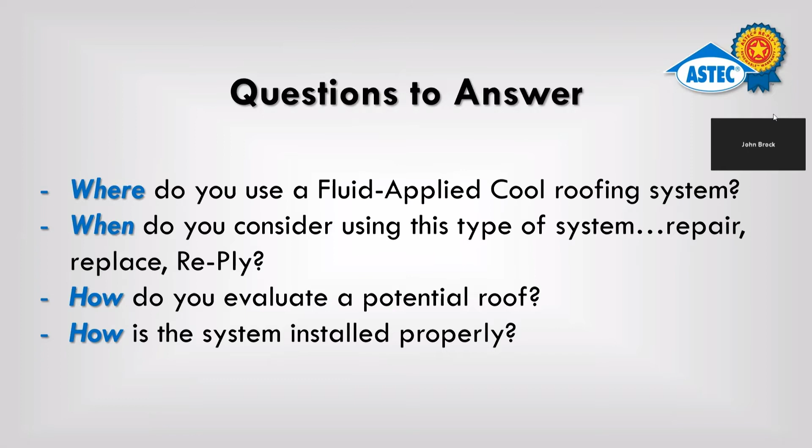So 35 years, 500 million square feet. There is a 10 or a 15-year manufacturer's renewable product and labor warranty. What that means by renewability, and we just did this back in 2015 on one of the most notable jobs we've done. You'll see photos of it later in the presentation. The Pensacola Naval Air Museum. If any of you have been down to the Pensacola area, we did it in 2005. They asked us to come out and redo it again in 2015, which we did.

So when the warranty comes up for renewability at the end of its life cycle, at the end of the warranty, you have the choice of having us come out, cleaning the roof, making any spot repairs, preventative maintenance as needed. The roof has already been waterproofed, so there's no need to waterproof it. We simply clean the roof and we install another 2 passes of our finished product over the entire roof. Once installed, we turn around and reissue another 10-year product and labor renewable and sustainable warranty. That is something you do not get from a typical roof application. That is one of the unique things with what we do and how we do it.

We talked about being monolithic. There are no seams on our system. We are Miami-Dade approved for wind uplift, which is very, very important. We have our product over the New Orleans Convention Center. And when Hurricane Katrina hit the Convention Center as a Category 4, I vividly remember watching that on TV as the Superdome's roof was peeling back. They were busing people and sending them over to the Convention Center. After Hurricane Katrina, we had 3 to 5 leaks on that building. Again, with no seams, there's nowhere for the wind to get up underneath it and to lift the roof. Therefore, we are Miami-Dade approved. Again, one of the most stringent in the United States.

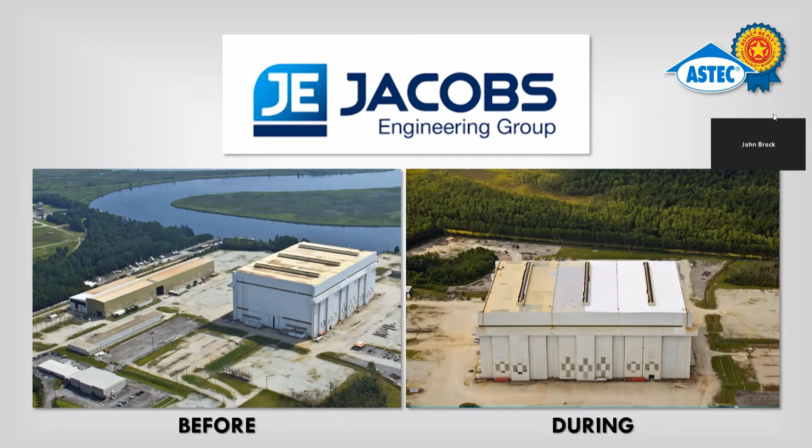Some of you may have heard of Jacobs Engineering Group, a very large organization here in our United States. You'll see a before here on the left, you'll see a during on the right. Again, this is several hundred feet up, the size of this facility. We had only bid this building originally, but things went so well that we ended up doing all the facilities that were there on the grounds, and you can see that there in the photo.

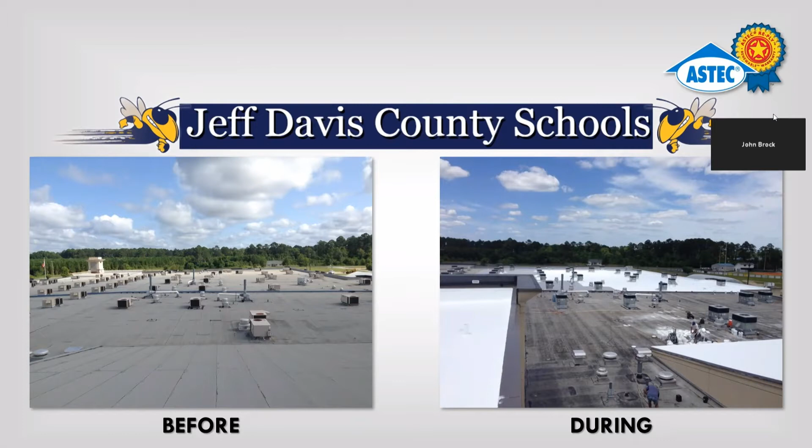Jeff Davis County Schools, this is a job that I sold in Jeff Davis County, Georgia. The city was Hazlehurst. This was their high school. This was a modified cap sheet roof, which is similar to your courthouse roof. And we put a system on here, a fluid applied system. You have the before, you have the during on the right, and then you have a drone photo of the after.

We actually were brought this job by a company called ABM out of the Atlanta area. They're an energy consultant group that companies hire to come in and show you how you can save money. And they chose to go with the ASTEC system for the roof. You can see the HVAC units up there.

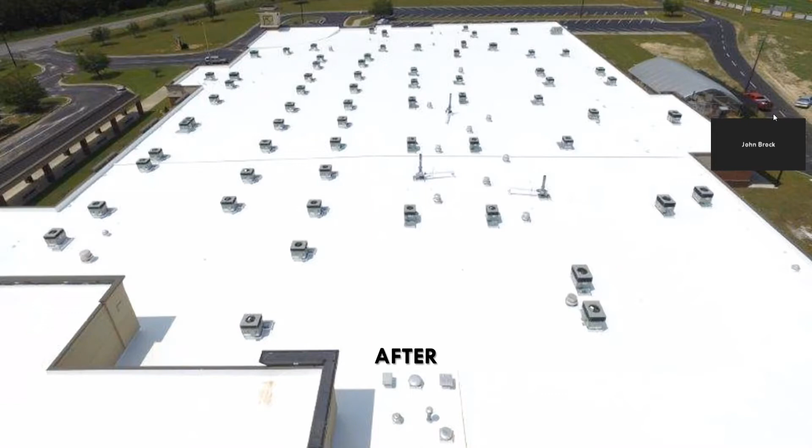I actually got a call several months later after we installed our system. They were worried that their ACs were broken because they weren't kicking on. Again, when you drop the roof surface temperature as much as 65 degrees, you're dropping your HVAC substantially when you have that many units up there. And they don't have to be serviced as often as well. So big benefits when you start looking at things this way. And of course, I've got a plethora of different reference letters from superintendents and different people throughout our organization.

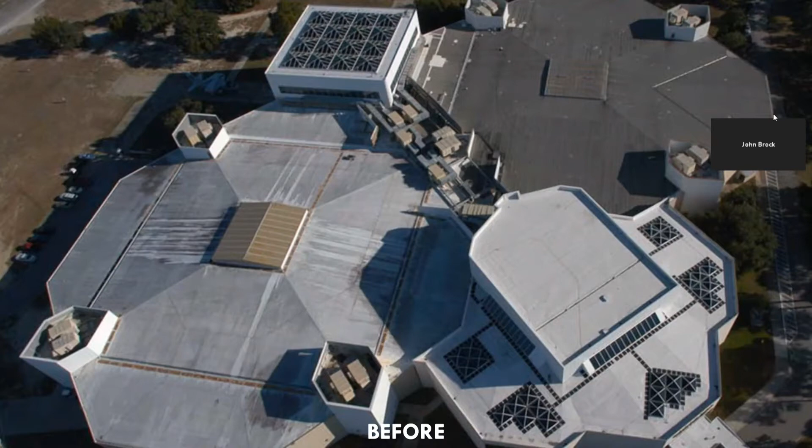The leaks were so severe in this museum that before ASTEC was installed, they actually had constructed an internal guttering system that drained rainwater into 50-gallon drums. That's how bad this roof was. Since then, again, we did it in 2005. We were contacted again in 2015, and we put the recoat on it in 2015.

Sustainability, that's a word we throw out there a lot. You know, what is sustainability? Well, it minimizes the burden on the environment, which in these days, we all feel that there should be a sense of urgency. It conserves the energy, and it extends the life of your roof by improving the long-term performance.

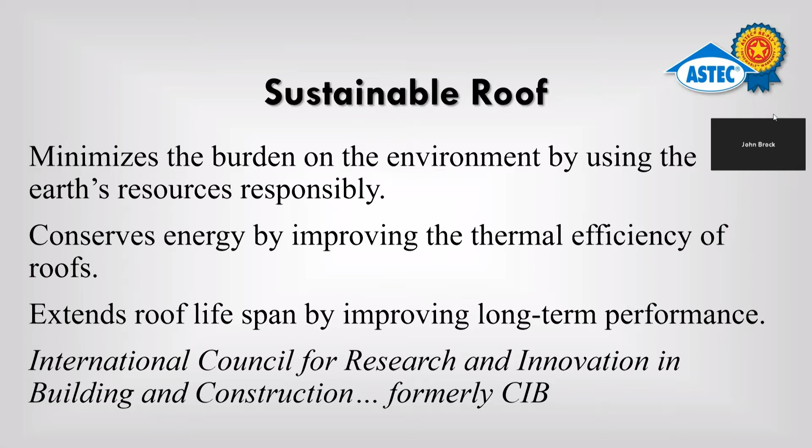We talked about temperature differential. These black EPDM roofs that you see here, the very bottom, 173 degrees. And then once you put our system in place, you're looking at what can actually happen and what happens once we're done. We're typically somewhere within 5 to 10 degrees of the ambient temperature outside.

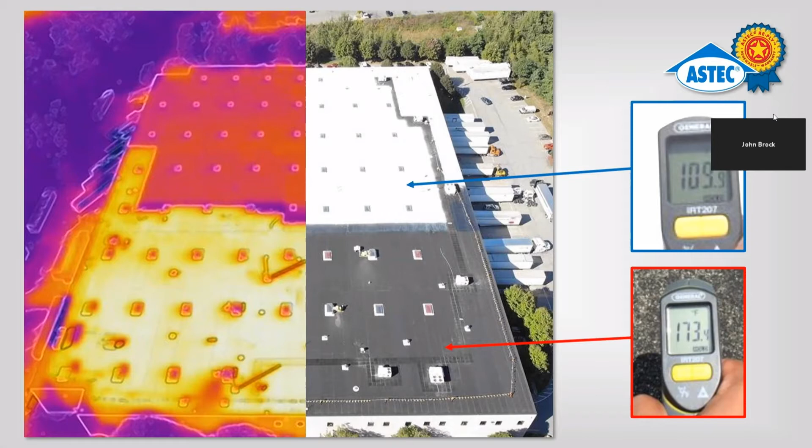So we need to evaluate, do roofs actually need to be torn off? Our network of contractors consists of roofers, waterproofing companies, commercial painters. A lot of different types of fields can install our system. Roofers make their living by ripping roofs completely off. But what's happened over the last 20 years is they realize not everybody has the funds to go back and pay X amount of dollars to tear the whole roof off, or they can't afford the downtime.

So roofers have come to us, and we've been able to recruit roofers as well, as a way of continuing for them to stay in front of their clients by offering a legitimate long-term solution through fluid applies, which is much easier on the wallet, I guess is a better way to say it. When we evaluate roofs, we have to know what is the condition of what's under that roof. You can't just go throw any product up on a roof and walk away from it.

There are plenty of people that do that. But again, we hold the warranty, so we have to make sure we got the right contractor. He sends photos to us of the core sample, of the deck, of the roof, of everything that we have to file away, and we have to make sure this roof actually qualifies. What type of insulation? How many inches of insulation? This is not a paint job. This is actually a very, very in-depth process.

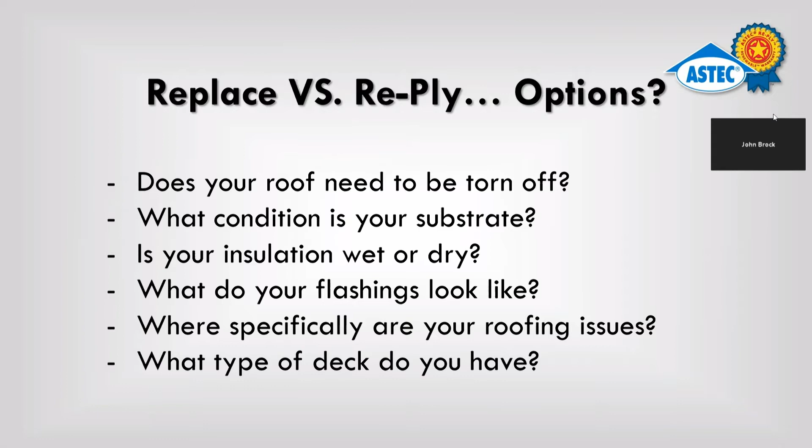What are the actual roofing issues? What do the flashings look like? What type of deck is underneath there? Is it metal? Is it wood? Is it concrete? Tony's going to go into a little bit more information on this later on, but when we look at life cycle costs, if you're looking for long-term benefits, we've got a conventional roofing system approach on the left, and then we've got the ASTEC system on the right.

So by national code, once you have two roofs up there, meaning your first roof might have been a tar and gravel roof, and then they came back years later, removed the gravel, or in some cases left it on, and then put a rubber roof over top of that, now you have two roofs in place. By code, your only options are to, one, tear off one of those roofs and put a new roof on, or option two, go with the fluid applied product. And so that's important to know.

Now, in this slide right here, you see a 2020 roof system. On a conventional system approach, you clean the roof, assuming there's one roof up there, and you can put another roof on top of it. For us, we go directly over that roof. We are a sustainable system, whereas a conventional roof system is not a sustainable system. We have up to a 15-year renewable and sustainable warranty.

What does that mean? That means for the full 15 years, if you have any issues on your roof, it is a phone call. You don't have to keep sending the local guy and his ladder to get up there and patch a hole with tar or silicone or any other product. We own that roof. It's a phone call.

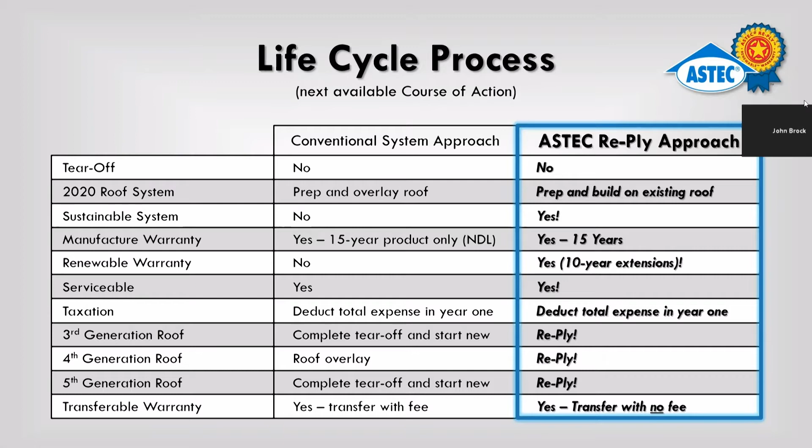Again, we simply clean the roof. We put 2 to 3 more passes of the finish coat directly back on the existing roof to rebuild the mil thickness of the product, and we go about the day. And that's it. We continue to do that. And both systems have a transferable warranty.

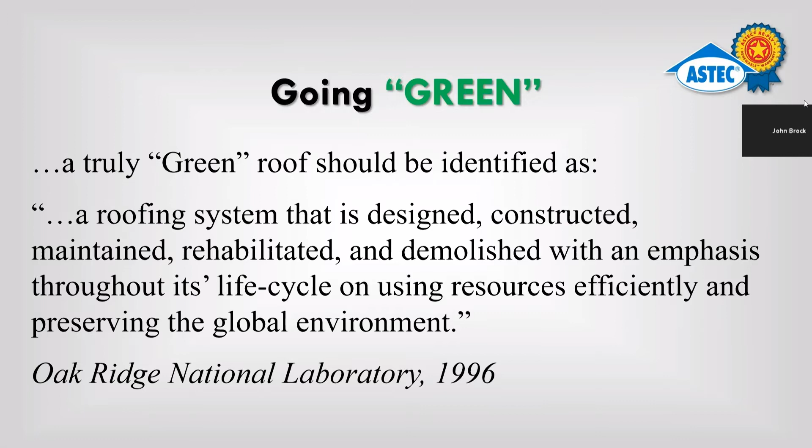A truly green roof should be identified as a roofing system that is designed, constructed, maintained, rehabilitated, and demolished with an emphasis throughout its life cycle on using resources efficiently and preserving the global environment. And that is exactly what we do with the ASTEC system.

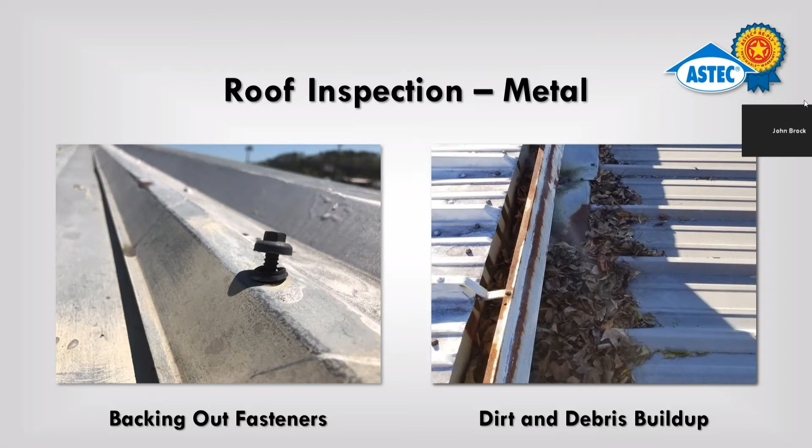Rust is a big problem on metal roofs as well. There's a lot of companies that will come out and just throw something over top of that rust. If it is not a rust inhibitor, and if you don't put the proper amount of coverage over that rust inhibitor or over the rusted spot, the rust will bleed through.

So we're not a one product fixes everything. We're not going to get on the roof and throw one product over there and say, hey, this will fix your rust, this will fix your moisture underneath, this will fix all. It doesn't work that way. We have to address each and every individual problem on its own. And we have a rust inhibitor, which is specifically designed for encapsulating the rust. It shuts out the air and water in which it needs to continue to grow and expand.

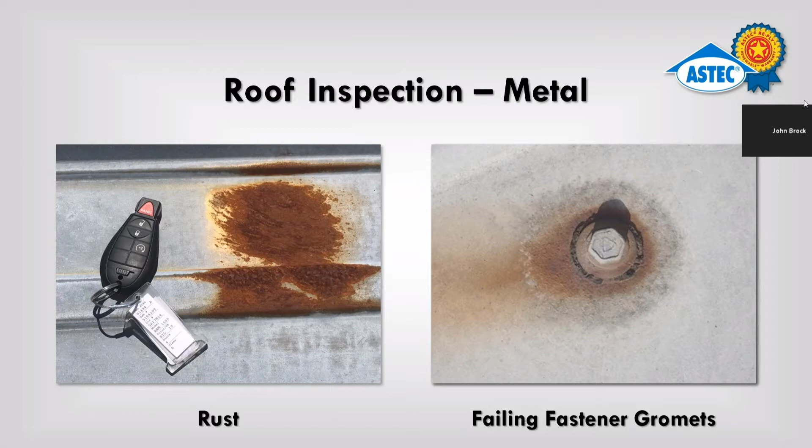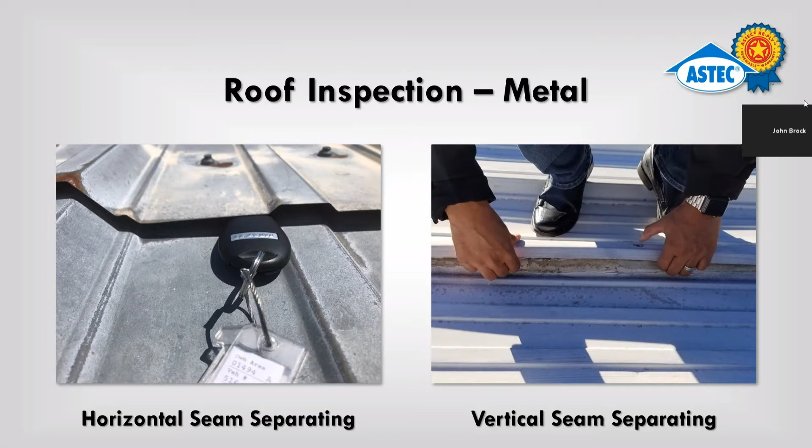You can see here in this particular photo how seams begin to open up. A lot of times this is due to thermal shock. A lot of times this is due to poor installation on metal roofs. It is important on any type of roof, whether it's a metal, whether it's what we call a cap sheet or an asphalt roof like the courthouse, or if it's a rubberized roof. Any pre-existing patchy material has to be cleaned.

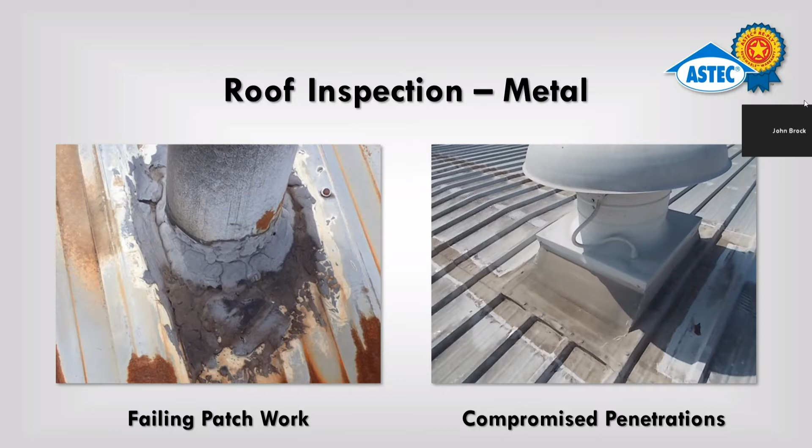We can't just throw our product over this, what you see here on the left, and call it a day. We are only as good as what we adhere to. So if there's any patching material on a roof like tar or silicone or roof cement or anything of that nature, it takes time for the contractor to take a 5-in-1 or a grinding wheel and grind all of that off to get down to the original roof so that we have a coatable surface.

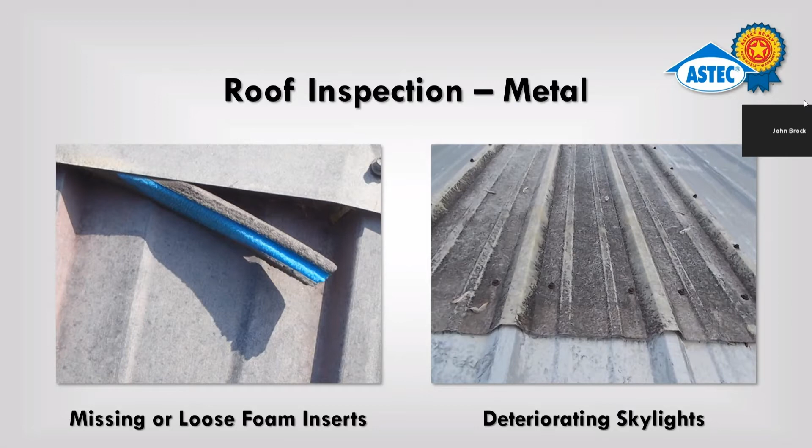We do address deteriorating skylights, and we address missing or loose foam inserts. I do realize a lot of you may have not been up on roofs before from a commercial standpoint, but on these commercial roofs, a lot of times the metal companies, when they put these roofs up there, they'll put these little foam inserts in these voids. The problem is they don't stay and they deteriorate.

So over time, as you can tell on this slide, we have a system that is foolproof in stopping these issues. This is a very tedious and time-consuming process, but it is a foolproof system. In 15 years, I've never seen a leak come from this system once it is completed.

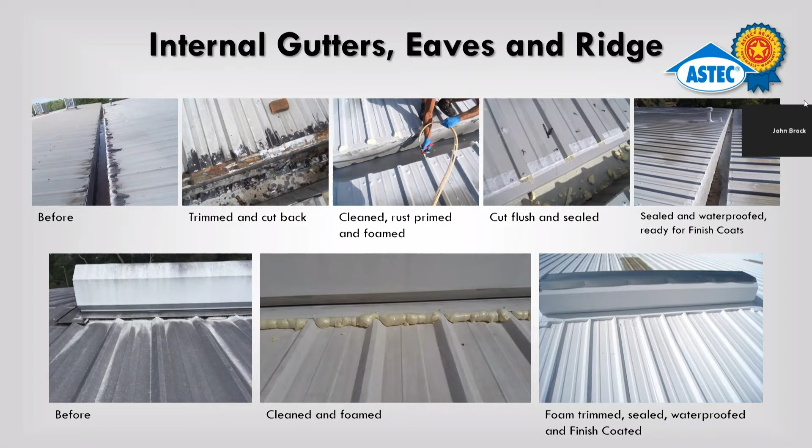So on metal roofs, we tighten everything. We replace any fasteners that are wallowed out or rusted; we'll take it out and put the next size fastener in. Any line items, such as replacing fiberglass skylights with transite skylights or new fiberglass, or if we don't need the fiberglass skylights anymore, we can put metal up there. Those are things that our contractors are skilled and qualified to do.

The actual ASTEC product is applied by a hydraulic spray rig in most cases. In some cases, we do roll it, like we will be doing on the courthouse. But the roof, first and foremost, has to be pressure washed and it has to be clean. Any areas that need to be repaired get repaired. We seal the entire roof. There is not an area on that roof that does not get fully reinforced with a fibered cloth embedded into multiple layers of a waterproofing product.

At some point, Tony will show you a sample of our product, and you'll be able to feel for yourself and see the actual thickness of our product. Where I'm sitting right now, the paint on my walls is probably 2 to 3 mils thick. We build our membrane very similar to a rubberized roof, where we're the same thickness or thicker. We're building a 50 mil system up to a 100 mil system depending on the roof. And that's the beauty of a fluid applied system: it is customized specifically for your needs.

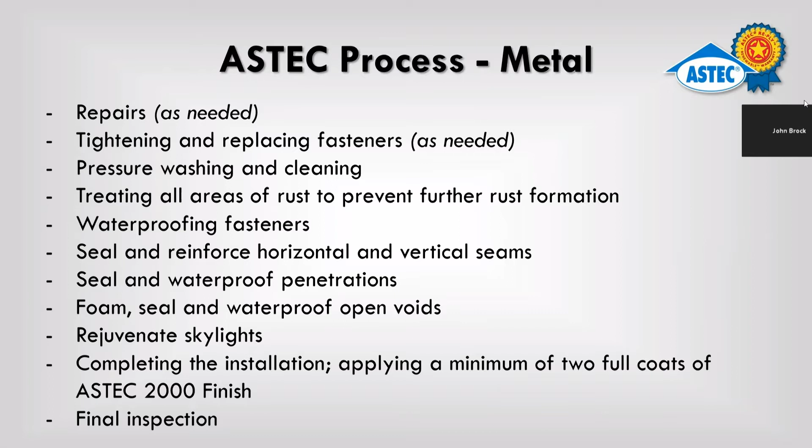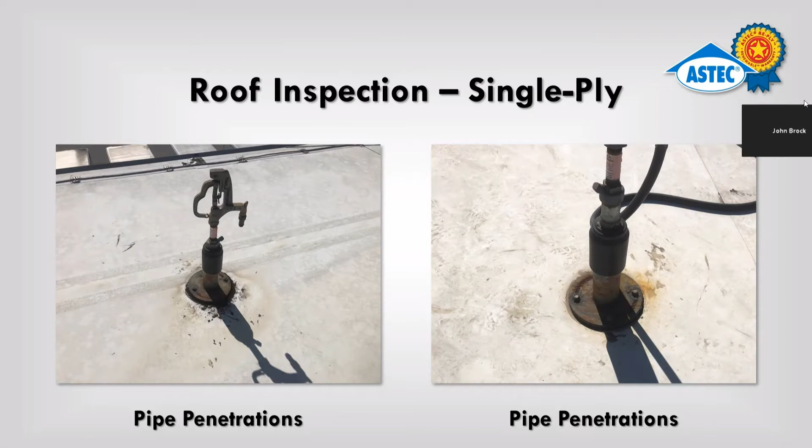On a rubberized roof, which we refer to as a single-ply roof, you're not going to get leaks out in the middle of the field. All leaks you're going to get are around any penetrations that go through the roof, around your HVAC units, your exhaust pipes, your vents, your stacks, anywhere there's a roof-to-roof transition, your gutter lines. All those are areas we pay extreme attention to, and we make sure that we seal everything the correct way. We address things such as lightning protection, as you can see in this picture. Any conduit that's up there gets addressed as well.

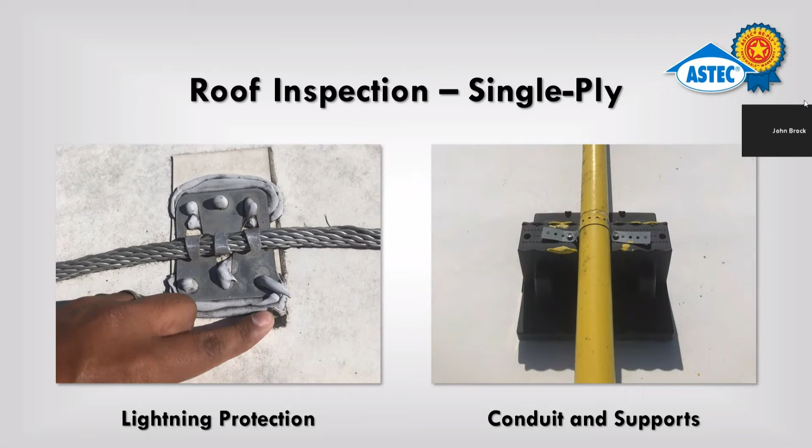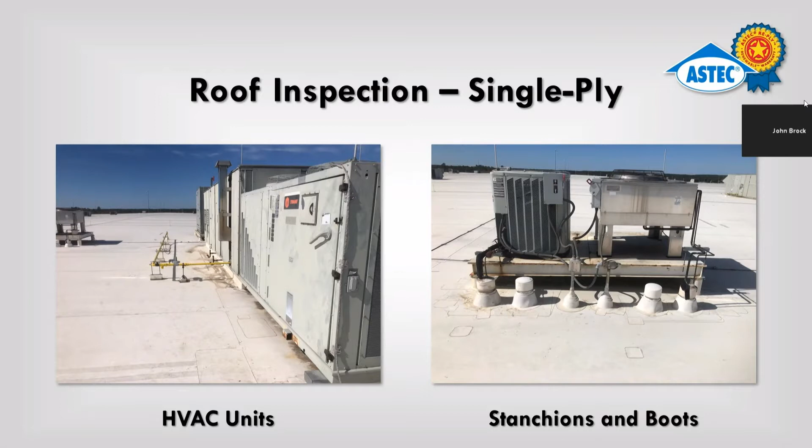The boots, as we call them, that go around a pipe that protrudes from the roof are usually a rubberized type boot. We seal around that rubberized boot as well. We do have a specific way of addressing walk pads. There are various ways in which we address walk pads, and each roof is different. Whatever proposal we put out for that particular building would have in detail our suggested action for the walk pads.

With our type of product, we warranty 100% any ponding water. That doesn't mean we invite it, and there's a difference. If there's a way to get it off, Tony will figure that out, whether we suggest putting in some internal drains, or we need to put foam up there and taper it towards one side of the roof. Just because we withstand ponding water doesn't mean we invite it. On flat roofs, you're gonna have ponding water somewhere. Ideally, we're gonna try to get it off. But if there are areas where it sits, and this is the beauty of a fluid applied, instead of 50 mils there, we might have 80 mils there. It will withstand ponding water.

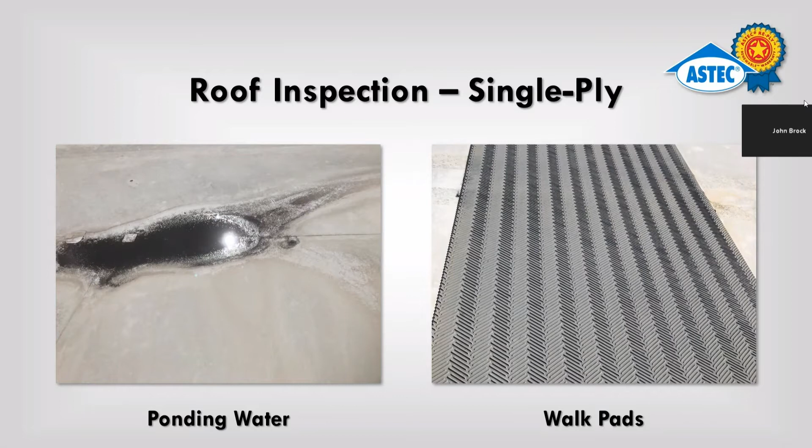We passed a 5-year underwater test from the Miami-Dade Public School District, which I believe at the time was the 3rd largest school district in the United States, and we've been spec'd for all of the public schools in Miami-Dade. So unquestionably, we do withstand ponding water. That's very important to note. That's covered in our warranty.

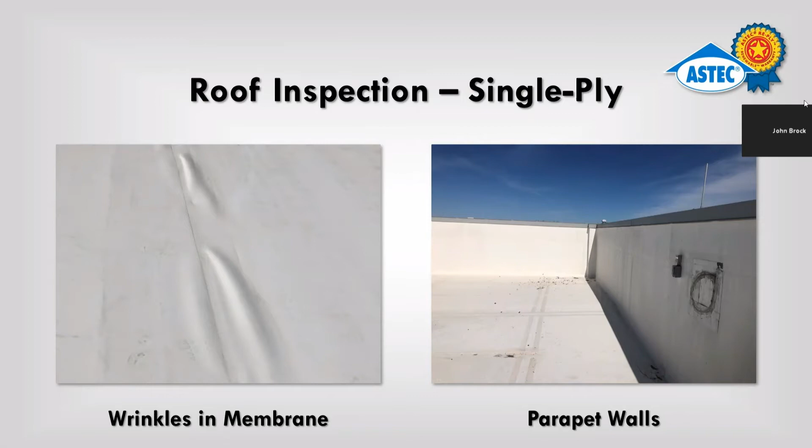Again, when you look at a single-ply roof, you've got wrinkles in the membrane, you've got different issues that need to be addressed, and all of our contractors are trained to address these individual needs as they arise. We make repairs, we address the roof, we seal it, we waterproof it, and we install our system.

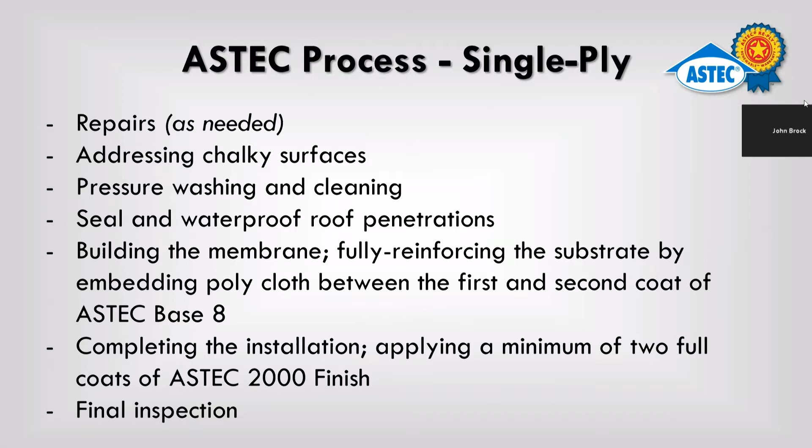Now we're getting to your actual type of roof, which is referred to as an asphalt roof, or the courthouse is also referred to as a rolled roofing or a cap sheet roof. You have little granules that are on the roof that are there to help waterproof the roof. What happens though is over the course of time, because of the UV degradation that hits that roof, the granules let go, and then they start filling up, and in some cases, I mean, we've shoveled truckloads of granules off of some of the roofs we've done.

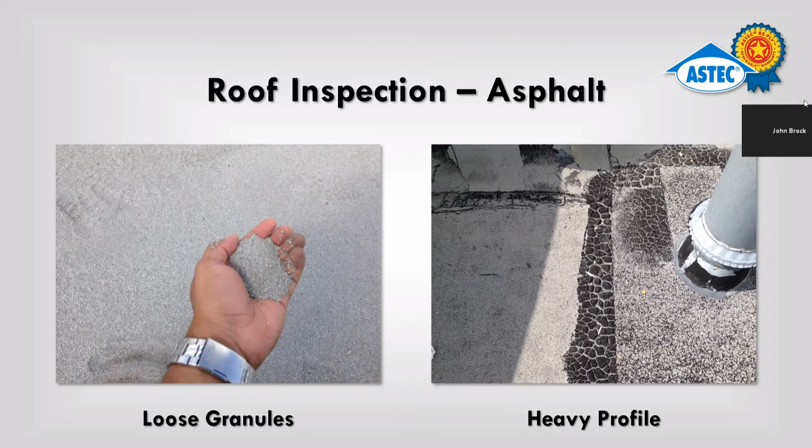A roofer would typically say you have to rip the whole thing off. In some cases, that is absolutely true, and we've walked away from plenty of those where there was just too much of the granules, and it wasn't going to be an economic decision for the building owner to put the fluid applied on there. But in this particular case with the courthouse, we have caught it in enough time where we are confident that we can do it.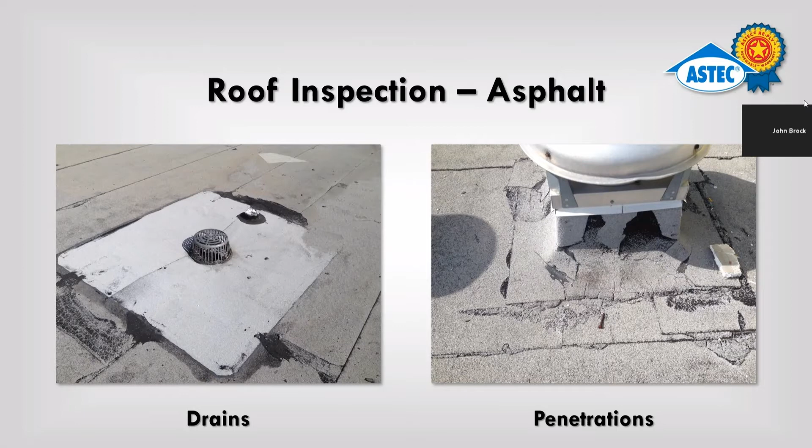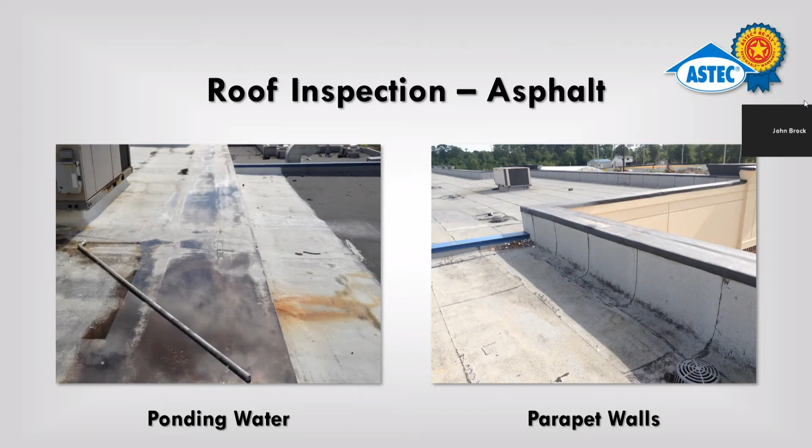Same problems on an asphalt roof as any other roof: heat, thermal shock, leaks around penetrations, around your drains. A lot of times when the buildings are constructed, for whatever reason, the drains actually sit higher than the roof. So the water doesn't get off. It just sits there in ponds on the roof. That's really what our contractors like Tony specialize in, is being able to come in and say, hey, we can do the roof, but in order to get all this water off your roof, we suggest putting a drain here, here, and here, and that will eliminate the core of your problems.

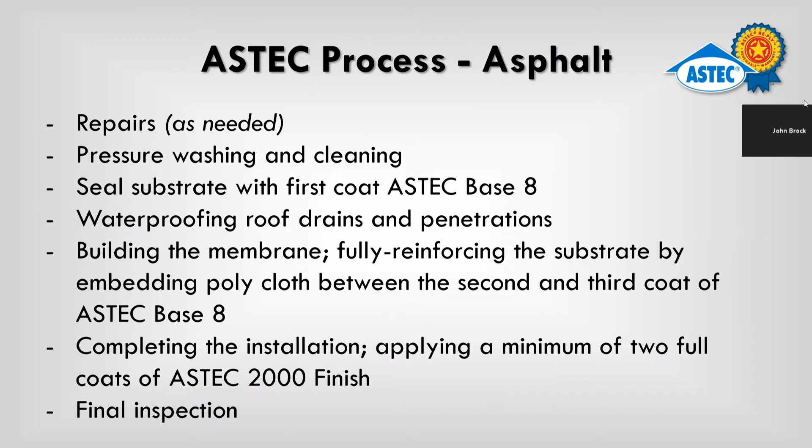Repairs, we clean it, we waterproof it with multiple layers, and then we install our ASTEC fluid applied system. Now, what I want to get into now, and Tony said an hour, and I believe I'm going to be able to cut it shorter than that, so bear with me here.

During the actual process, typically we'll inspect the roof. An ASTEC representative such as myself will come out and inspect the roof. It is not required. There is no continual maintenance requirement. We don't have to come out every month or every 6 months or every year to inspect the roof. Once the roof is down, it is down. Your warranty is issued. But when I do come into town for business, we do like to be able to get up on the roofs, make a formal introduction, and we like to see the quality of work that our contractors do. Our contractors are required to send us photos before, which I have, during the application, and after the application.

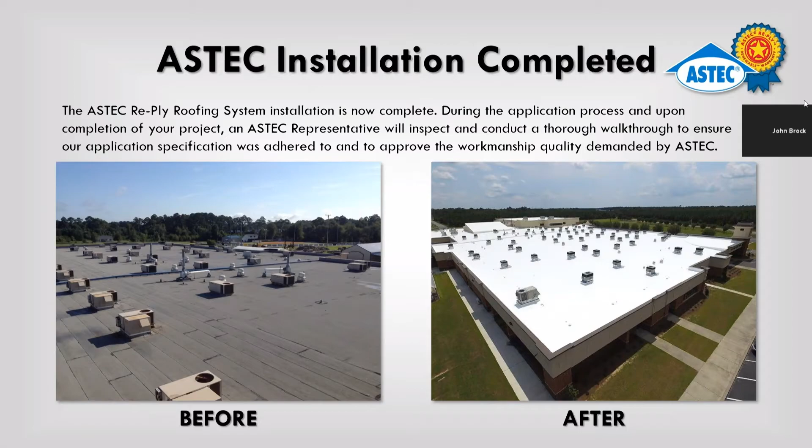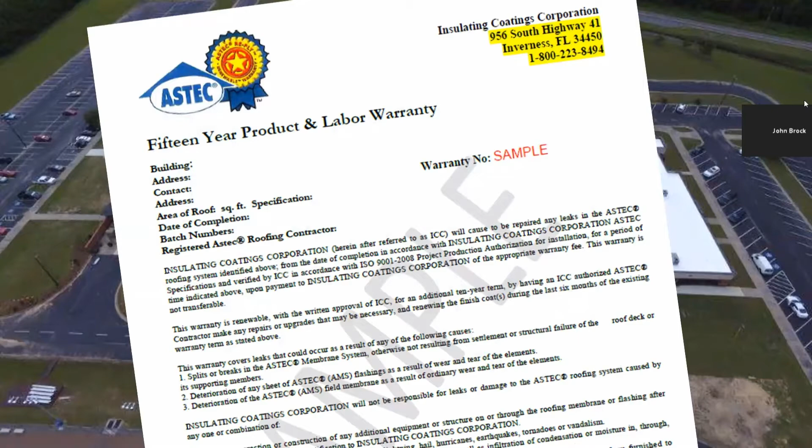And again, just another reference letter here, this is the sample warranty here for our 15-year system we put on the roof. So I mentioned how we do a lot of schools. We've done a lot of schools throughout the United States. We do a lot of public schools, a lot of private schools. We do a lot for our military, both stateside and abroad. We're in over 40 different countries. We've done U.S. embassies. So this is legitimate. We definitely have a long track record of doing business with credible organizations.

These are some school projects here that we've done throughout the Southeast. Again, we did roughly 35,000 gallons in the Orlando Public School District area last year alone. So that kind of gives you an idea of what we've been doing and how we've been doing it. Now, the question is, if there's so many different coating companies out there, John Brock, then why use you? Why use ASTEC?

And we're almost towards the end here, this is really what I want to get into, is we buy the premium roofing polymers from Dow Chemicals, the premium polymers, bar none. We buy the most of them, bar none, than any other fluid applied company in the world. Okay, we're the largest buyer of the 100% acrylic roofing polymers in the world from Dow Chemicals. That gives us the ability to put a renewable warranty on there for 10 or 15 years. It gives us the ability to withstand ponding water. It gives us the ability, because we're more or less factory direct, to be competitive in the marketplace. So those are a few of the reasons as why choosing ASTEC.

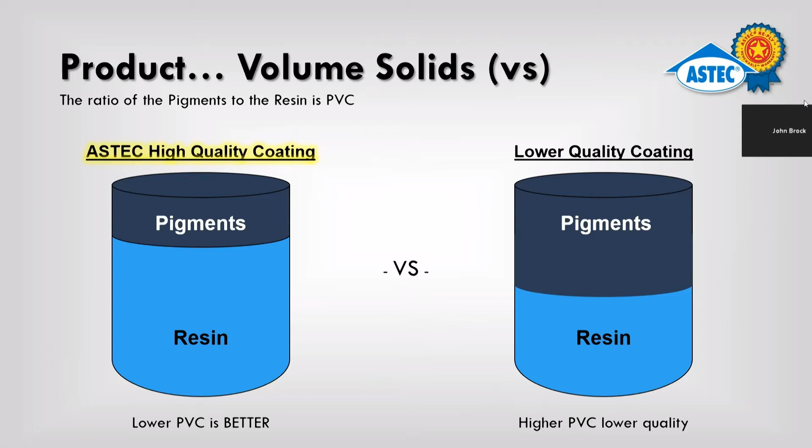So yes, both might be 62% solids, but it's what makes up that 62%. You want to have a much higher count of resin. You want to have a lower PVC, the pigment volume concentration, a lower amount of that and a higher amount of resin. And with ASTEC, we do have the premium out there, if you will, of resin. That's why we're able to do what we do.

So big savings, it avoids tear-offs. It enables funds to be spread out to other avenues in which they originally might not have been allotted for, because you're saving money on what you might have budgeted for. You might have budgeted X amount for this, and you get a cost on a 15-year credible system from a company who's been doing it for 35 years, 500 million square feet, and now you're looking at only using half of what you had. That is one of the big benefits, and that's one of the things that I really want to stress. That's it.

I think I went less than an hour, but Tony's right. I do tend to talk a little bit. At this time, I'd just like to open the floor. If there are any questions, I'd be more than willing to help. I don't see any questions. Tony, go ahead. Thank you, John.

Folks, I'm going to hand out to you here some literature for the ASTEC block. Inside the fold, we have the survey that was done, we have the proposal, and behind that, we have the different systems that we do: Metal, Single-Ply, and Asphalt.

Tony, those two gentlemen in the back, my facilities director and his assistant. I'll give both. I got one. This is different. Oh, different. All right. Chairman, I have a question if I can. Okay, you want to hold your question, or you want to ask it now? I can hold it. John, that's no problem. I can hold it. Okay. Go ahead. Okay.

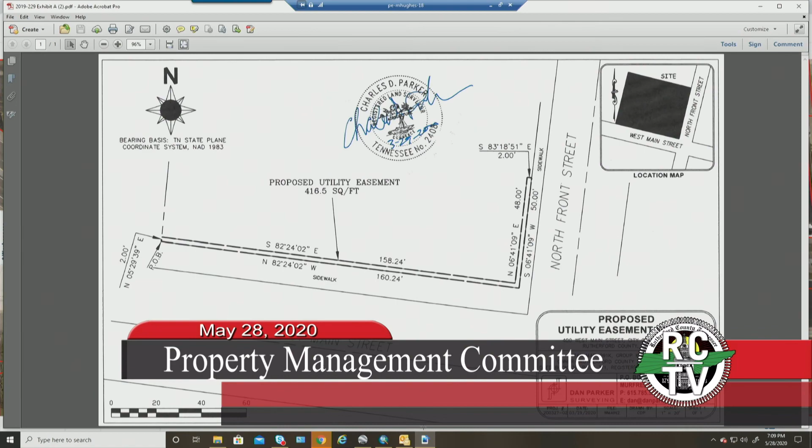And of course, at the end of North Front Street, we're going to place what's called a fiber optic splitter. And then we're going to service them and then all the folks in the area. And that's also going to enable us, as other folks in the area want high-speed internet, to build our lines and extensions to other businesses in the area. And so how far off the sidewalk would that be? We're just asking for a 2-foot easement as well as a 20-foot temporary construction easement. And then we're just going to basically put our line right behind the sidewalk, from across the street through that zone and then across the street and up on the pole.

If this committee decides that they want to try to sell that piece of property, which I'll probably be recommending at some point in time, Mr. Chairman, we might as well sell it. Put it on the market and let's see what we can do. Is this going to prohibit us from, cause an issue for us? No, sir. It's only 2 feet. Okay. And what we've learned is that whenever these properties get facilities like ours built there, the property value goes up about 5%. So it's a huge benefit. And in this area, AT&T and the other folks, they don't have any broadband speed or services that we offer. It's all very slow. Okay.

Are y'all part of Middle Tennessee Electric? Yes, sir, we are. And are you going to be under their specs for depth and conduit and cover and inspections? Yes, sir. Basically everything will be placed 24 to 30 inches deep in conduit, all per the normal specs. Any more questions? Well, Mr. Chairman, I would certainly appreciate a motion from this committee so I can execute the agreement to allow them the easement on that. Do I hear a motion to that effect? Motion to approve. Second. Second by Commissioner Johnson.